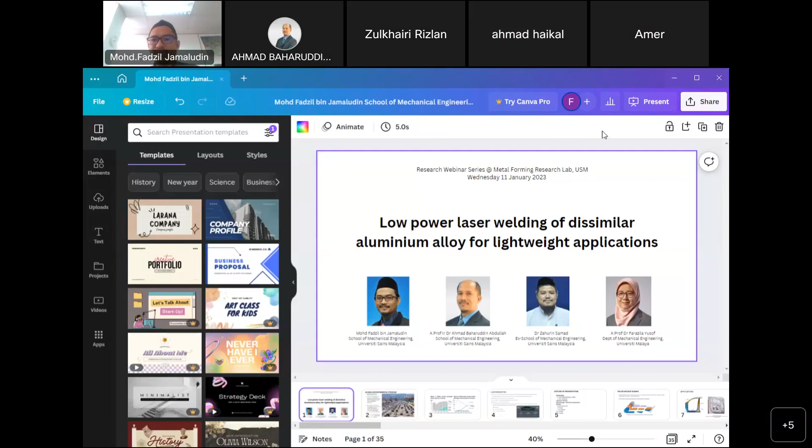Thank you very much to Associate Professor Dr. Ahmad Baharuddin for the introduction. This afternoon I will be presenting the updates of my research on low power laser welding for dissimilar aluminum alloys, which is used for lightweight applications. Team members: myself as the student here, and my supervisors Dr. Ahmad Baharuddin and Zahurin, and Associate Professor Farazila from University Malaya.

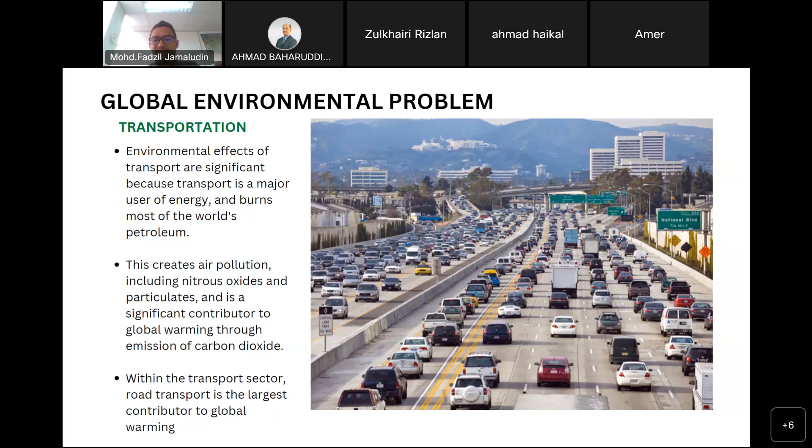The motivation for this study is based on the situation now where we are having global environmental problems from transportation. Transportation is a major use of energy, and the output from our combustion engines causes air pollution and carbon dioxide emissions. This problem is becoming worse because there are many developing countries such as China and India where the status of life is increasing and they are demanding luxuries, having cars on the road.

Even though we are having electrification in terms of electric vehicles and hybrids, data predicts that the number of vehicles will keep increasing year by year. Even though the internal combustion engine vehicles may reduce in the future, the overall numbers will be increasing, approaching 100 million vehicles per year.

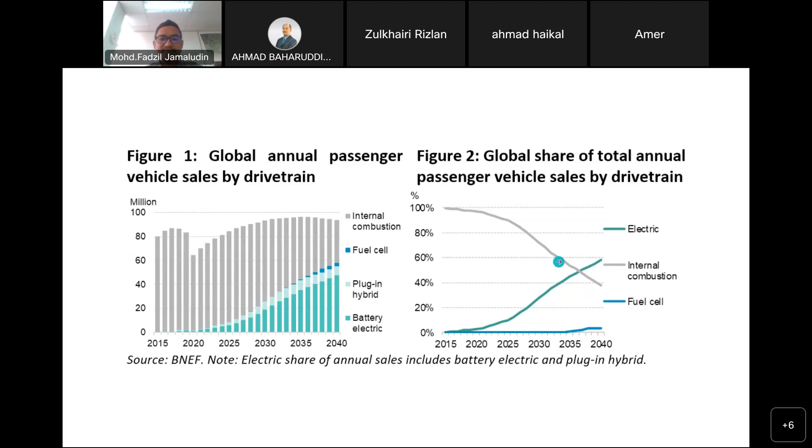So the concept of lightweighting is making the vehicle lighter, regardless of the engine, whether it is using petrol or batteries. The concept is building vehicles that are less heavy to achieve better fuel efficiency, while at the same time maintaining safety and comfort.

Because of this reason, there is a renewed interest and focus on lightweighting. It is said from the literature that a decrease of 10% in weight will translate to a 5 to 8% increase in efficiency. So the key driver here is carbon dioxide emission, and manufacturers are investing in solutions to solve this problem.

The recent ones from Hyundai: they have a lightweight development technology, just recently in 2019. They have a special unit purposely for reduction of weight. And to reduce the weight, it is not just a matter of replacing one material with another. It can also be in the form of redesigning components, and also the selection of manufacturing processes.

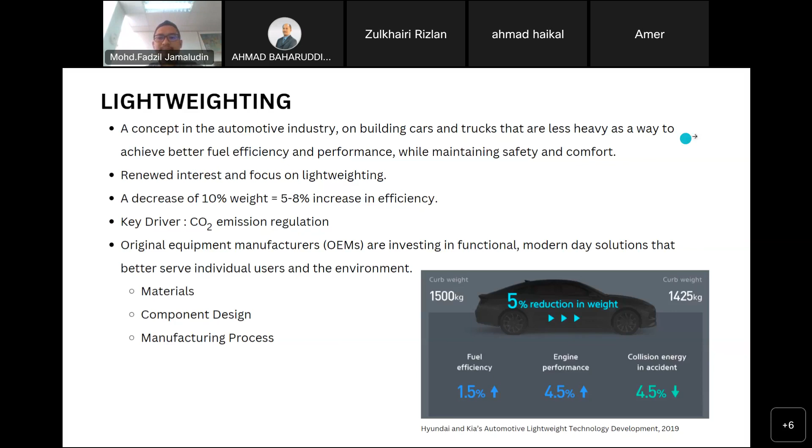So with that background, just an outline of the presentation today: I will be presenting an introduction on tailor-welded blanks. It's not exactly a new technology, but we are seeing it increasingly used in the automotive industry, especially for alternative materials. And on the topic of laser welding, laser welding is not something new, but new technologies in laser have some interesting applications. I'll also present a bit of my experimental work and results on microstructure, showing how the laser welds aluminium, along with some results on tensile and spring back evaluation.

So briefly on tailor welded blanks: the concept is making sheet metals by combining different portions of metals together to make a tailored blank. The difference can be in terms of material, or differences in thickness, or differences in properties. Some sheet metal may have coating or treatment, so that makes it different. So combining them, even if, let's say, they are from the same alloy, because of the different treatment, they become different in response.

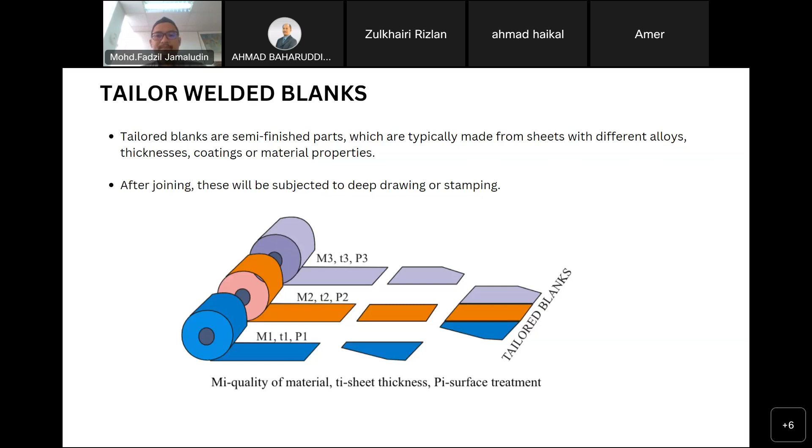And its application: it is being used for the structure of the vehicle. For example, this is a side structure. You can see that these components have different thicknesses, and even here they have different material, different material. So we are placing the strength where it is needed.

It is being used for steel-based sheet metals since the 1980s. It was mostly used in high-end vehicles because this was new technology, but it's being used in mass-produced cars nowadays. For the door component, you can see there's a line here - so this part is one material, and another part is a different material.

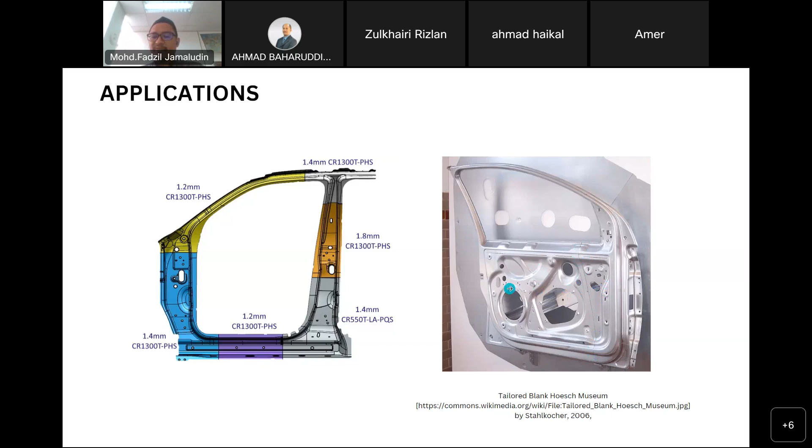This is an indication of where tailor welded components can be used in the vehicle - mostly on sheet metal components such as the door sides, the body shell, the bonnet, and so on. And there are two types of components: either it is welded as a butt weld tailor welded blank, or it can be made as a patch blank, overlapping.

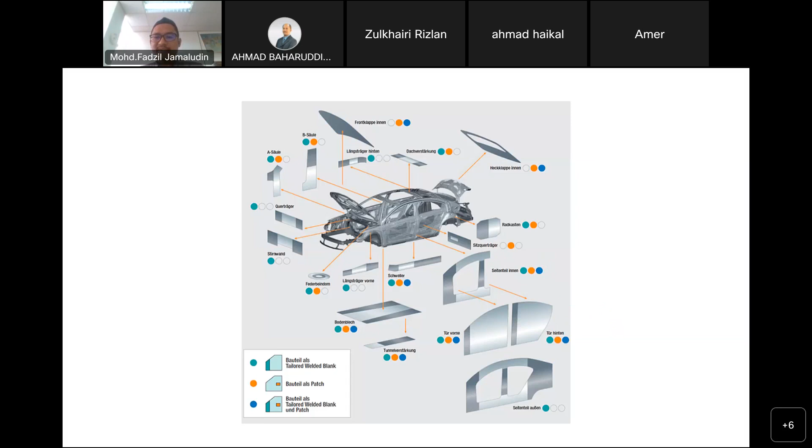So previously, for steel tailor welded blanks, the weight is reduced compared to a normal single sheet metal. But the motivation is that if you convert it to aluminium, it will be lighter because aluminium is just one third of the weight density of steel. So in a way it is lighter, and if you start incorporating aluminium into tailor welded blank components, there is more potential for weight reduction.

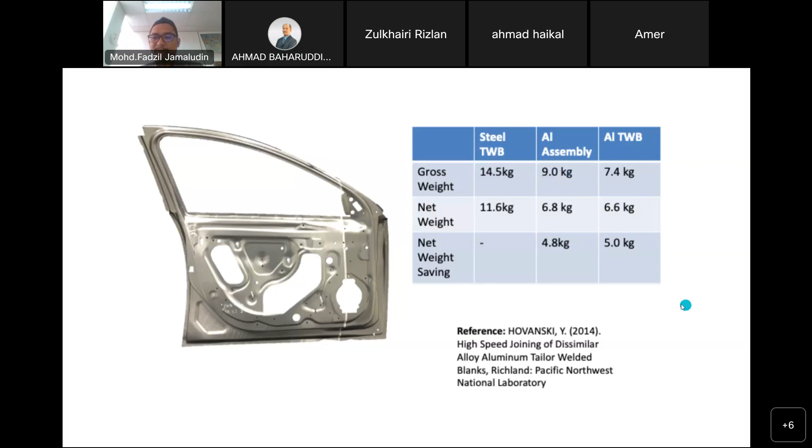A little bit on laser: so laser welding is not actually a very new technology, but there's recent development in fiber lasers. Previously it was using carbon dioxide lasers, which have a higher wavelength, meaning the heat source or heat input is big. But the recent development in fiber lasers means the wavelength is smaller, it is more efficient, and the beam is of higher quality. So there's new applications or new interest in fiber lasers.

Fiber lasers, as seen from recent development, come in many types: the high-powered lasers, the medium-powered, and the low-power lasers. Usually the low-power lasers are used for very small applications, thin applications, for micro applications. The one we have in the lab is a very simple low-power laser, which doesn't require that much power or in terms of any uses, so it can be installed easily.

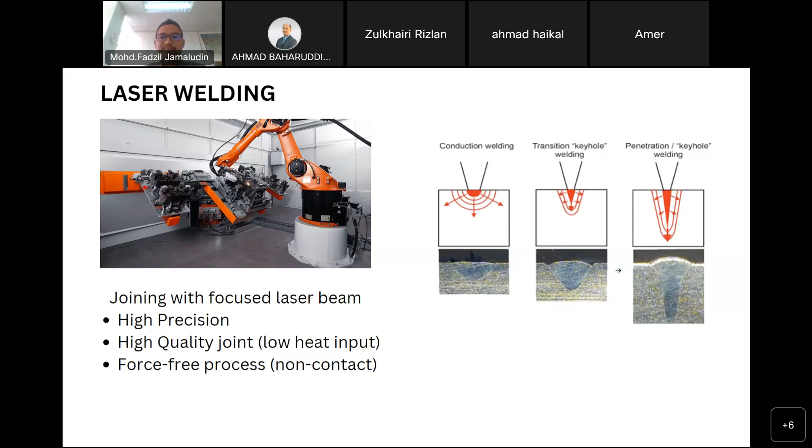Okay, so coming back to my research - as I said, laser joined tailor welded blanks are already in commercial use, but laser joining of aluminum sheet is challenging because it is not so easy to weld aluminum due to the reflectivity of the material. We have proposed that low power lasers are not well documented - there's a few research going on with low power lasers, but not much on actual welding of metals.

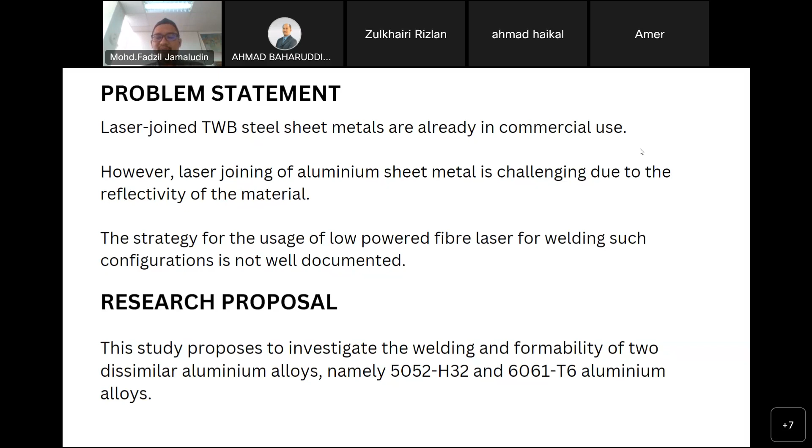So the research proposal is on investigating the welding and subsequent formability of two dissimilar alloys. In this case, we are choosing the 5 series and 6 series aluminum alloys, and examining their mechanical properties and formability properties. As Dr. Baha mentioned, formability studies are not being explored in detail at the moment, so this is something we are currently pursuing.

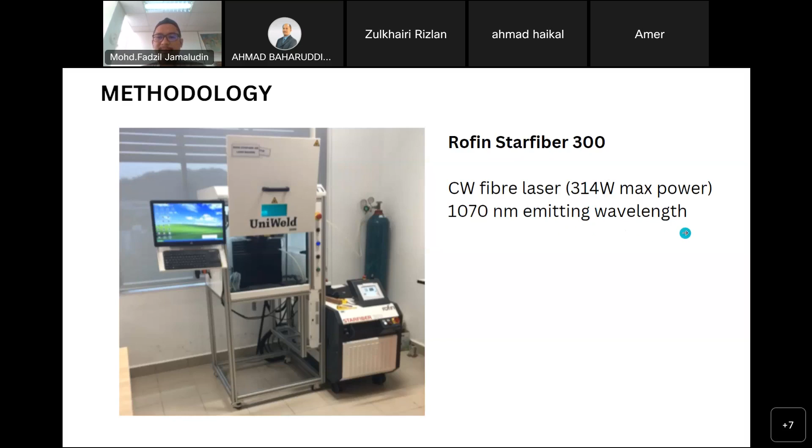So what we have here is the lens system. The lens will position the laser beam. This is called a scanning lens, so we will scan the length of the weld.

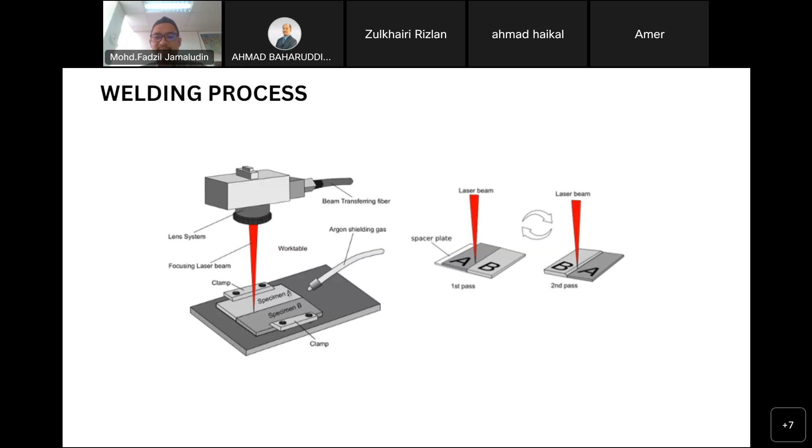In our case, because of some previous studies, we are proposing what we call a double-sided weld. Because of the low power, we found that the penetration depth cannot achieve what we desire. So we proposed that the weld be done in 2 passes: you do one pass, then the specimen is turned over, and we do a second pass using the same parameters on the other side of the specimen.

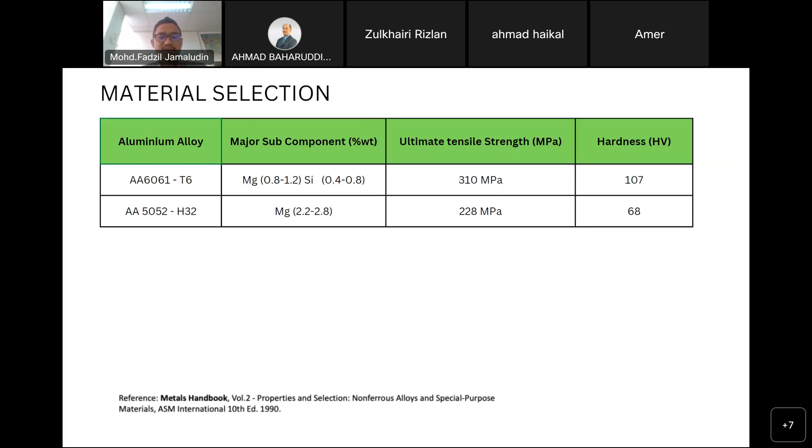And the material selection, this is from the handbook, and we also did EDS to actually see what the components in the materials are.

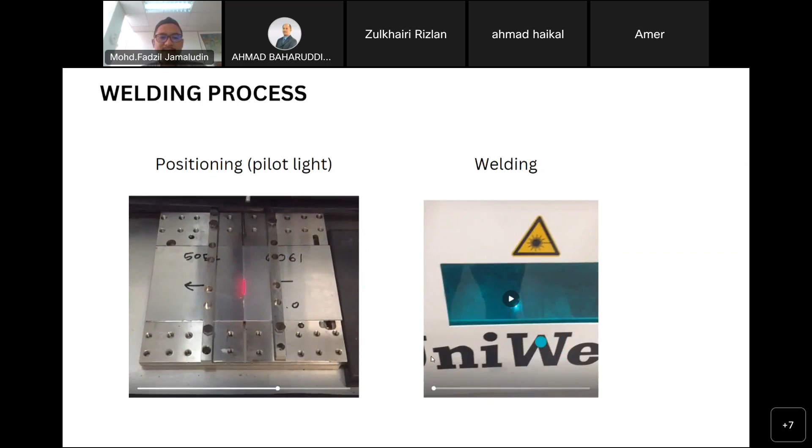And then when we are actually welding it, it is being welded—this is a very fast weld. It takes around less than 10 seconds to do the 10 mm weld.

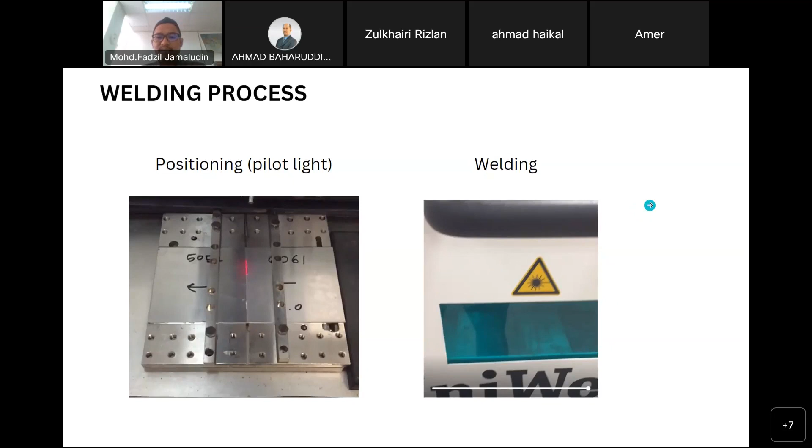So for our preliminary test, what we did was weld 6061 and 5052, and we arranged it into a Taguchi experiment just to see what the influencing factors are. In this case, we just evaluate the laser power and the welding speed, and so on.

So for this test, we have tested 3 groups: the same alloy but different thicknesses, different alloys with the same thickness, and different alloys with different thicknesses.

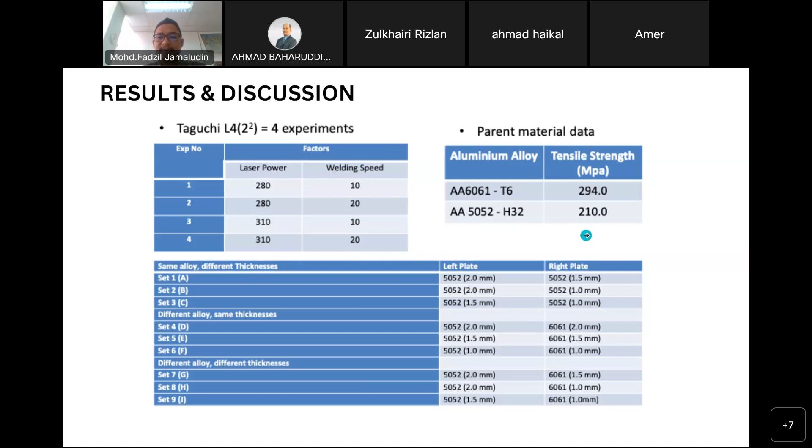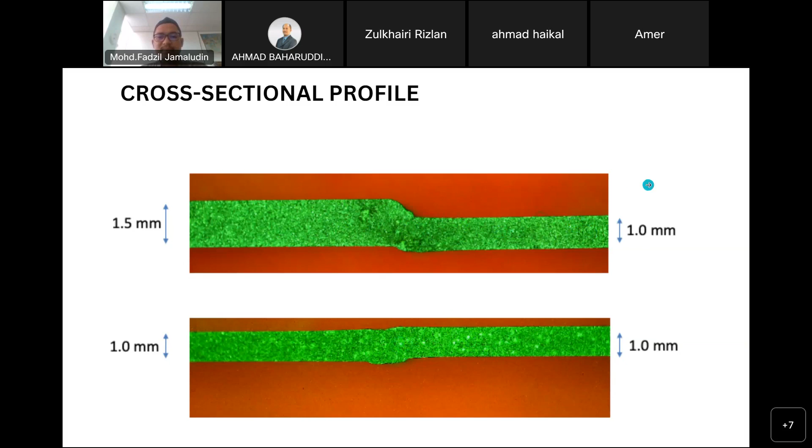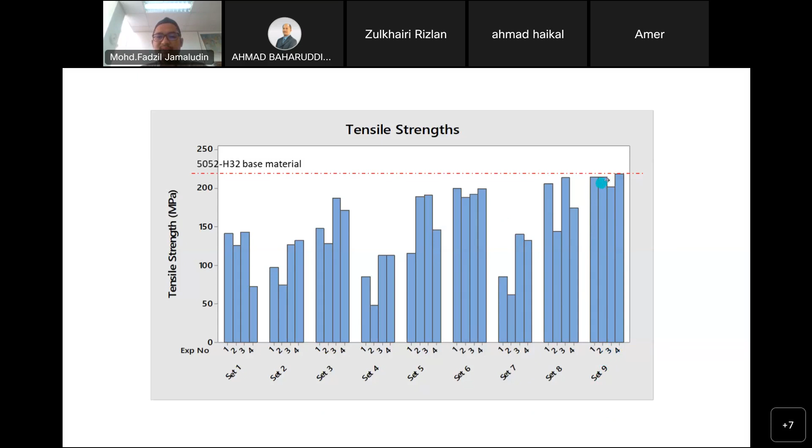In terms of tensile strength, overall, in general, for all samples, it was less than the base material. The tensile strength is less than the base material, but for some samples it is approaching the tensile strength of the base material. As you can see, for set 9, with different thicknesses and different alloys, it is approaching the base material strength.

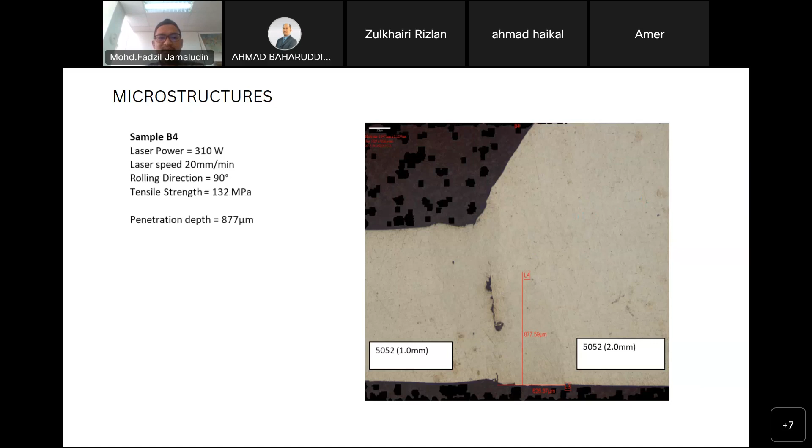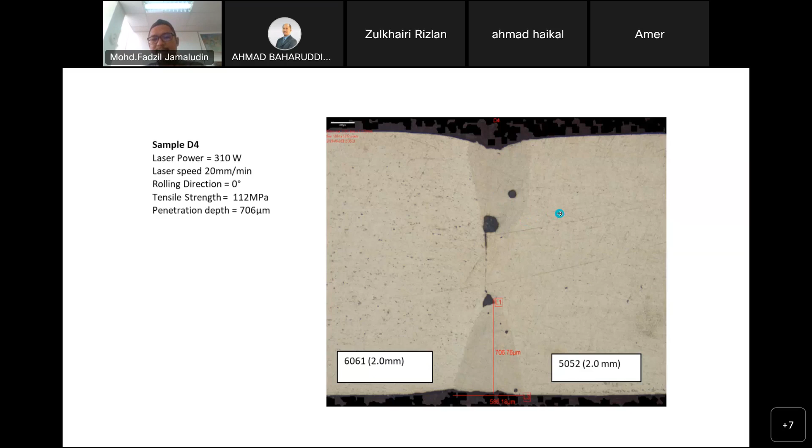For different alloys but the same thickness, this is much clearer for the same thickness at 2 mm. You can see that for 2 mm it cannot be done properly because the penetration depth is only 700 microns, so you have some areas which are not welded. This is one of the reasons why the samples have less tensile strength, because only a portion of the sample is welded.

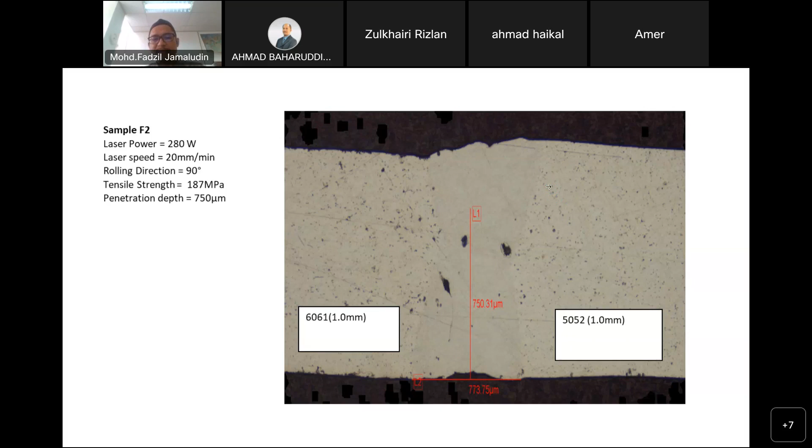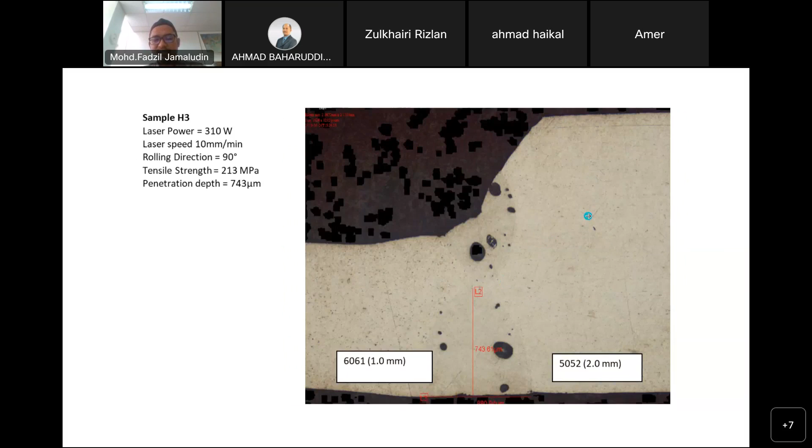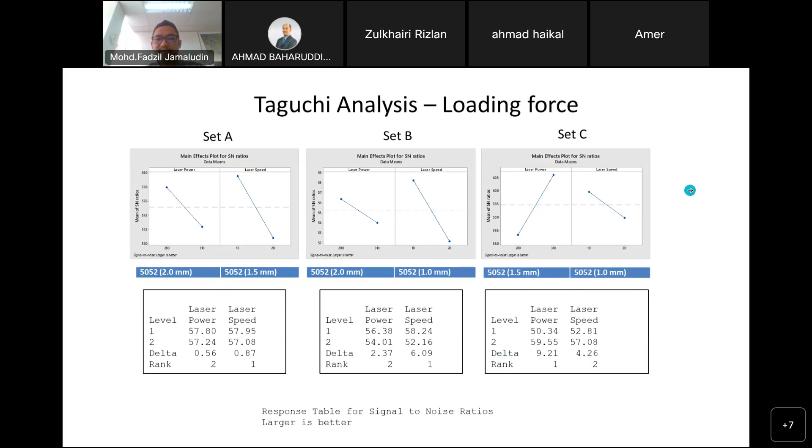So from the Taguchi analysis, we can see that the most significant factor is the laser—laser speed and laser power, with laser power being more significant than laser speed. So in terms of ranking, laser power ranks higher, having a greater influence on the tensile strength.

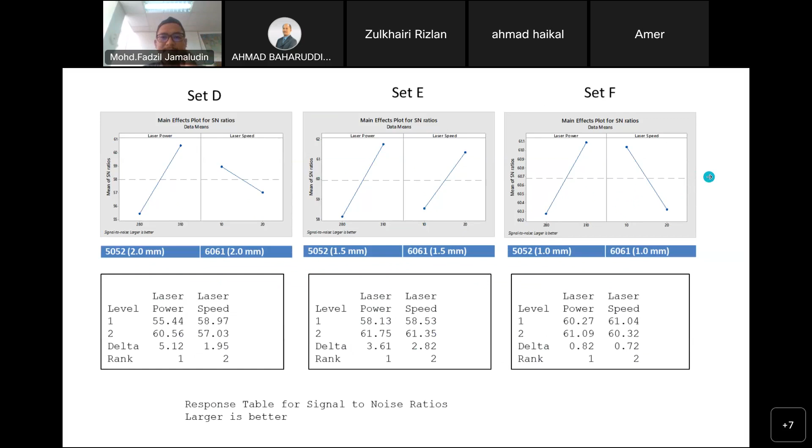Okay, this is overall for all the samples, 3 groups. So for the tensile test, what we have observed is that it achieves 86%, nearing the tensile strength of the lower specimen or lower strength parent material.

The laser power was shown to have the biggest influence on the load, unless one of the segments has a thickness of 2 mm. I think the 2 mm was because the weld was not successfully made.

As for number 3, we mentioned that partial penetration was observed for thick specimens, and for smaller specimens at 1 mm thickness, we can see an overlapping of the weld bead, which is desirable, but unfortunately porosities are observed, and this can influence the mechanical properties.

For welding of aluminium, porosity is something that, even with other welding technologies, cannot be completely avoided, but we try to minimize it. This is another area we can look into. Porosity is usually caused by entrapment of gases during solidification while welding.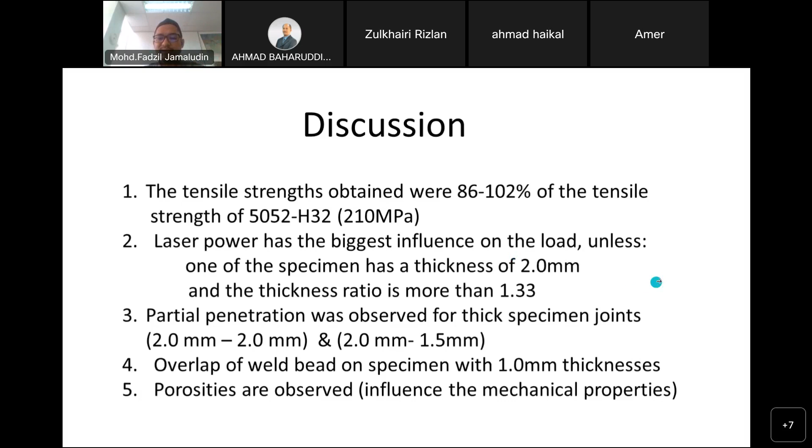A little bit on the spring back studies we did later on. Spring back is important because once we form or create the specimen or component we want, we need to take spring back into account.

Spring back is that, because of elastic recovery, once you bend it, it will tend to return to its original shape. So in most cases for sheet metal forming, spring back is something we need to take into account.

Either we can modify the die to take into account the spring back, or we can do some other processes. So the final shape is a deviation from the working shape of the die.

Why it is important is because large structures are really made up of sub-assemblies. For example, you make one component of the car, you stamp it, and we need to assemble it. If it doesn't follow the shape we want, the assembly becomes very difficult. So these are things we need to understand, things like porosity that we cannot avoid, but we need to understand.

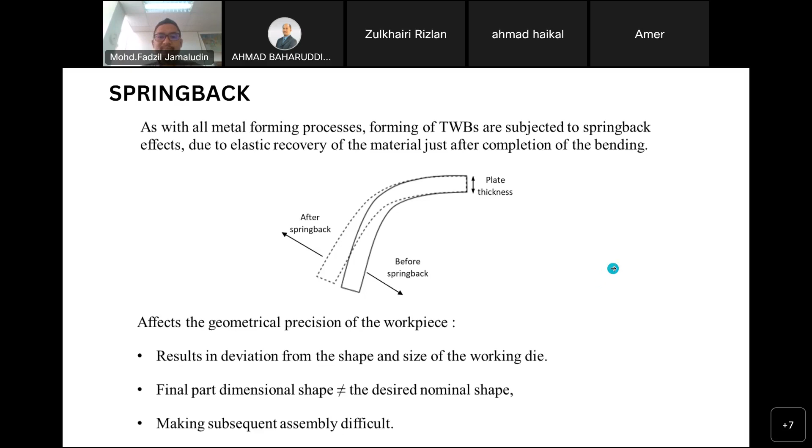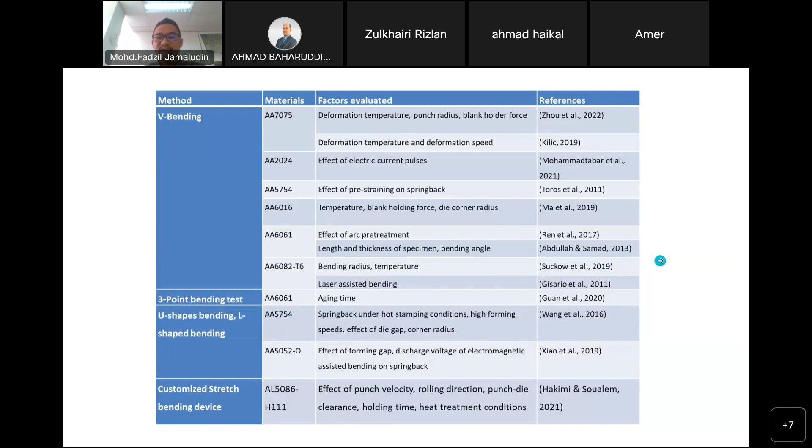There are many studies done on methods of evaluation, either by V-bending, 3-point bending test, or customized bending devices. In our studies, we focused on V-bending because it is quite straightforward. So for the samples we prepared, coupons from the same welding plate.

Coupons of 20 mm by 100 mm, and we selected two groups: similar alloy and dissimilar thickness, and dissimilar alloy and similar thickness. We focused on 1.5 mm and 1.0 mm only, because from the previous study we saw that 2 mm is quite difficult to weld and the results are not so good.

So we are focusing in our second section only on the 1.5 mm to 1.0 mm joint, and these are the welding speeds and parameters that we used.

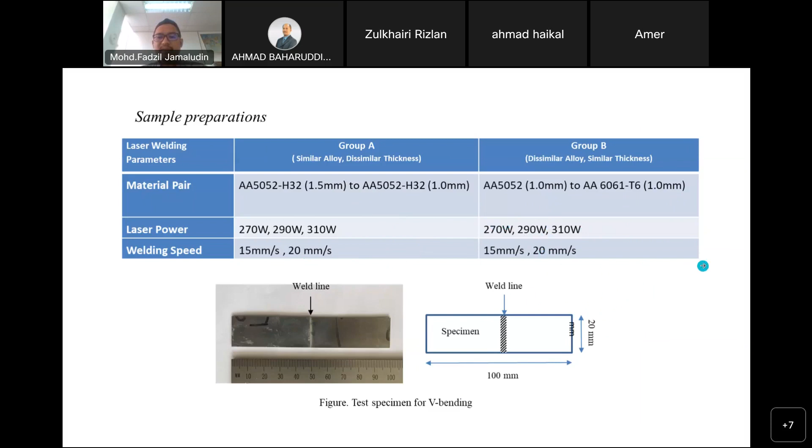We designed this V-bending testing jig, which is mounted on the Instron machine. What we did is move the punch so that the coupon would bend by the punch, and it is kept in place.

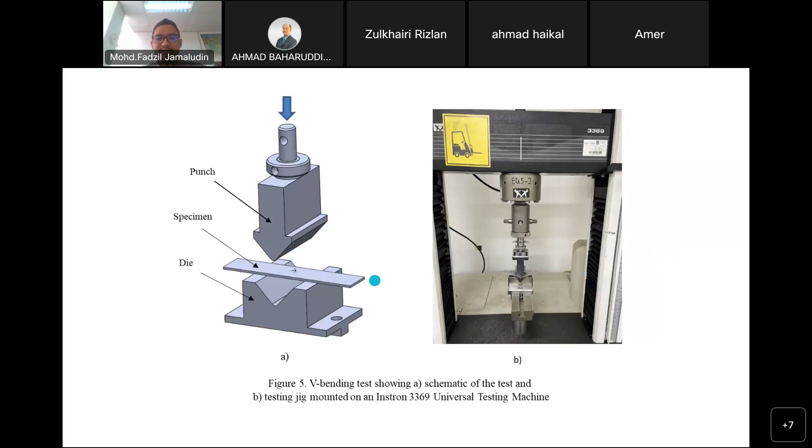You punch it until it reaches the bottom, then it is released, and the specimen tends to spring back. Since it's a 90 degree angle, the difference in angle indicates the spring back angle after unloading. We use a profile projector to accurately measure the spring back from the specimen after being punched.

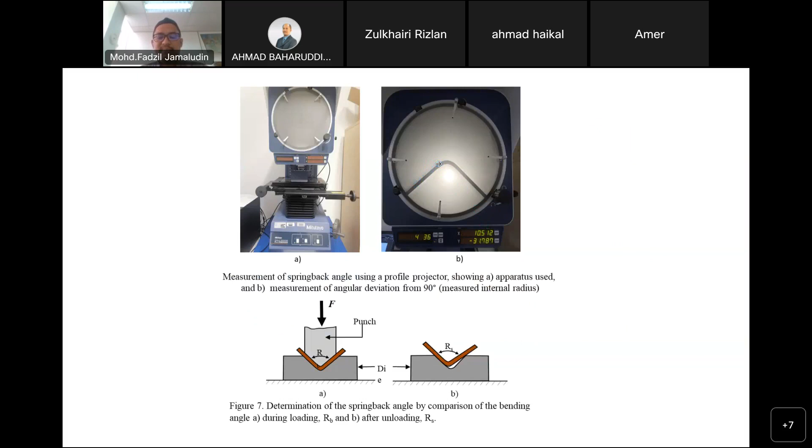To compare, we tested it on the parent materials, so we know what spring back the parent material has, giving us the range of spring back for aluminium 6061 and 5052. From this evaluation, you can see that the spring back for 6061 is higher than the 5 series in our case.

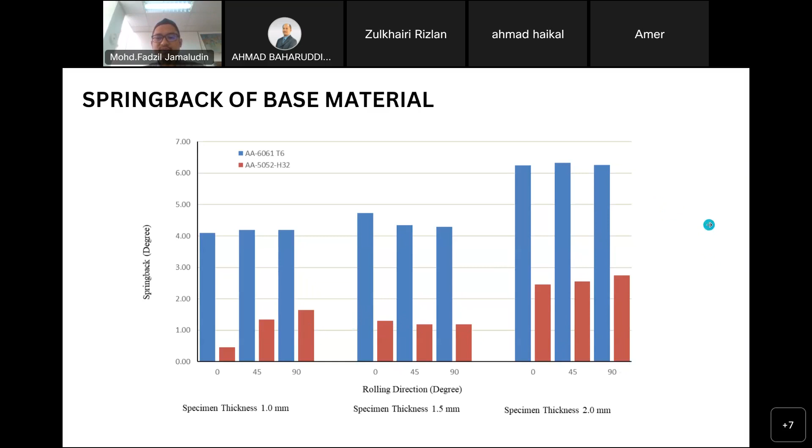This was for all thicknesses, 1.0, 1.5, and 2 mm. We also have some 2 mm just for comparison. You can see after we did the tests on the specimens, these are the results we got from group A.

So what we have observed is that the spring back for tailor-welded specimen has a better performance as compared to 6061, but it is inferior to 5052. And for particular laser power, increasing the welding speed would increase the spring back angle for the joint.

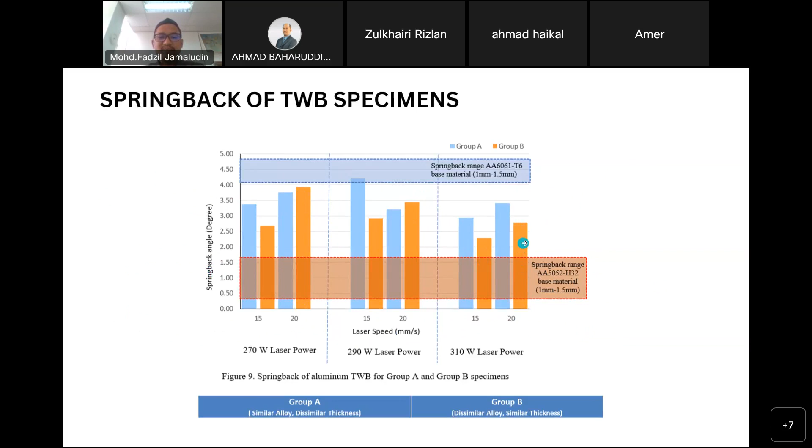For particular laser power, what particular power? So for this one, it tends to be higher. For particular laser power, tends to be higher for the laser welding speed, increasing laser speed.

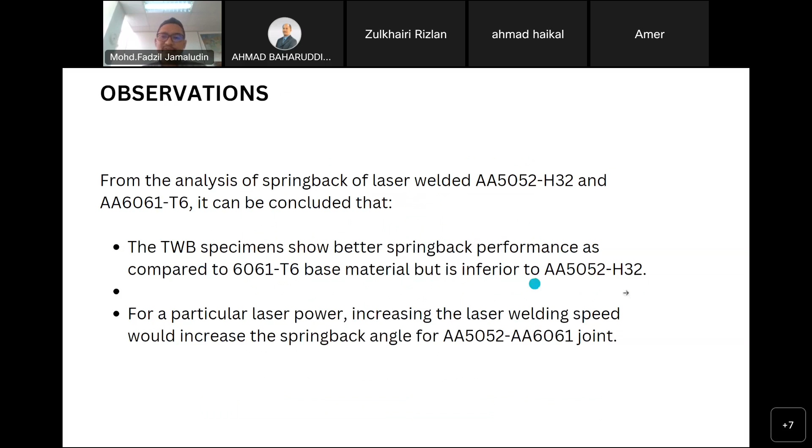Okay, that is all for the presentation on my part. I hope it can be beneficial and as an introduction to the fiber welding for dissimilar aluminum alloys. So thank you very much.

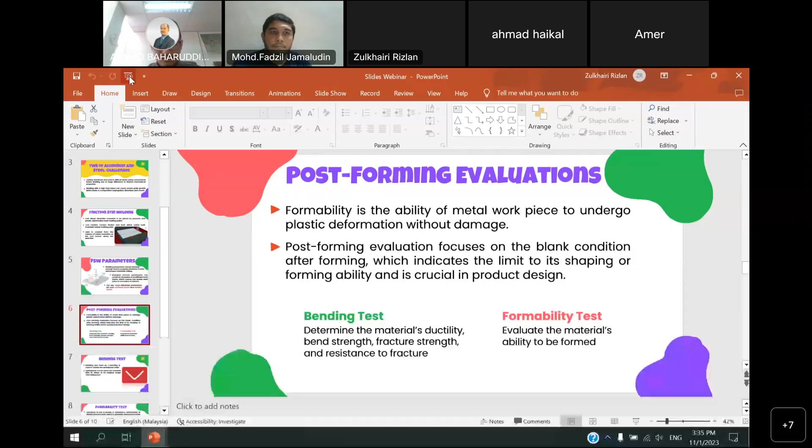Alright, Assalamualaikum and good evening everyone. My name is Zulkhairi and I'm about to share about my research here, which is formability study of aluminium and steel friction stir welded blanks.

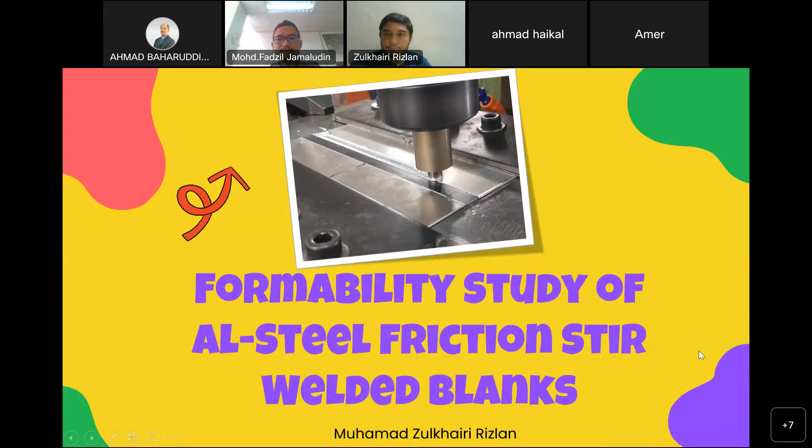So in terms of application, the tailor welded blank of aluminium and steel is used in less critical sections of parts where it is not necessary to use high strength steel but require lightweight components. For example, in automotive industry, high strength steel and lightweight aluminum alloys were applied to enhance performance, reduce weight, and with reduced weight, you get more fuel efficiency, which is beneficial to comply with fuel economy standards.

Some of the industrial applications that has utilized tailor-welded blanks can be seen in the Honda Accord 2013 models, where they use friction stir welding, cast aluminium and steel in the engine parts and subframes. Another one is the Mazda MX-5, where they use friction stir spot welding, aluminum and steel, and aluminum alloy and steel on the trunk lid parts.

For shipbuilding, use of aluminum and steel joint can eliminate problems such as presence of crevice and galvanic potential difference, which will result in corrosions when using mechanical joining methods such as bolting or riveting.

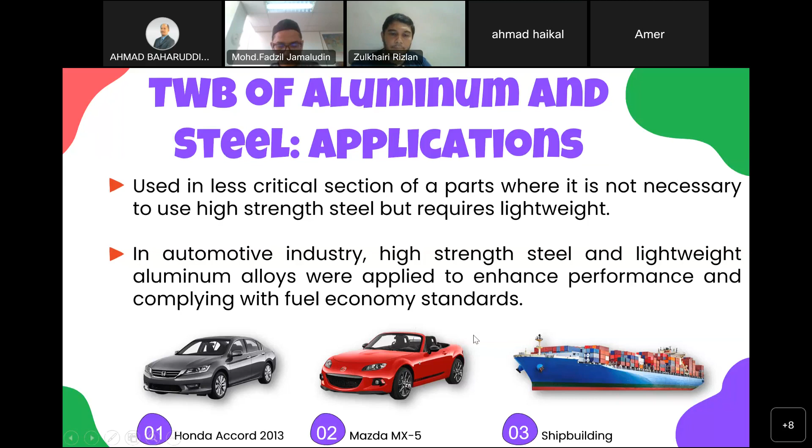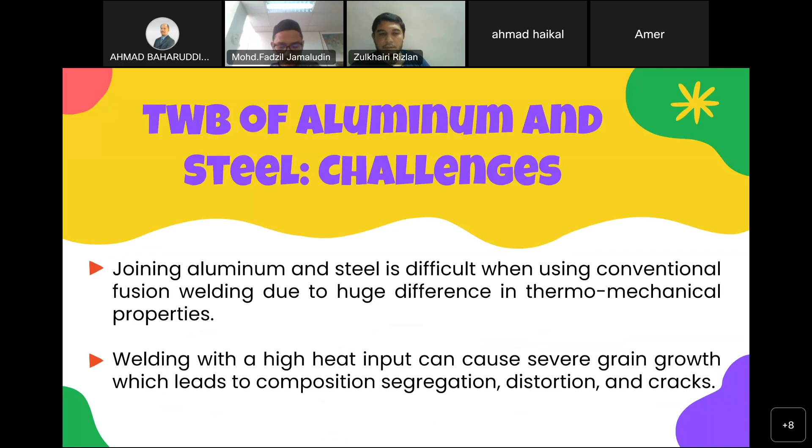So the challenge in the tailor blank of aluminum and steel is the difficulty to join when using conventional fusion welding due to the huge difference in thermomechanical properties. And welding with high heat input can cause severe grain growth, which will result in problems such as composition segregation, distortion, and cracks. So this is where friction stir welding came in handy.

This allows dissimilar materials to be joined by pressure and plastic deformation under the melting point, as can be seen by the animation here. Friction stir welding works by using a rotating tool, which is rotated and plunged into the interface of two workpieces. The tool is then moved through the interface of the workpiece, and the frictional heat causes the material to heat and soften. The rotating tool then mechanically mixes the softened material to produce a solid state bond.

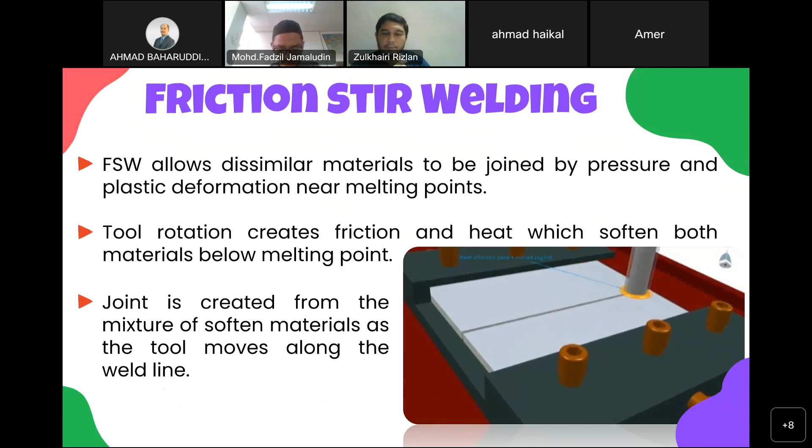Basically, the parameters in friction stir welding should generate enough heat to properly plasticize the material and ensure proper material mixing, since improper process parameters can result in excessive or insufficient heat input, which will cause a low quality weld joint or formation of defects. There are many parameters involved in friction stir welding, but based on previous works as well as mine, the two most influential parameters are rotation speed and welding speed.

So these two parameters are the most responsible for heat input variation in friction stir welding. For example, if the rotation speed is high, then the heat input will be high as well. Contrary to rotation speed, for welding speed, if the welding speed is high, the heat input will be lower.

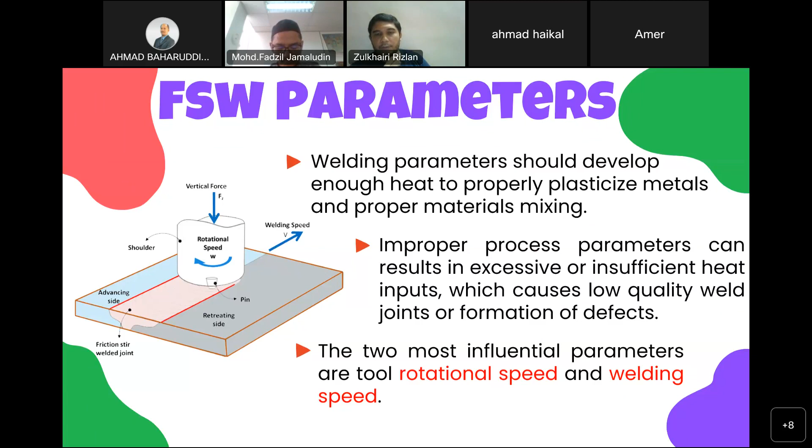Formability is the ability of a metal workpiece to undergo plastic deformation without damage. Post-forming evaluation focuses on the blank condition after forming, which indicates the limit to shaping or forming ability, and it is crucial in product design.

There are two post-forming evaluations of a joint that can be done using bending and formability tests. Bending test determines the material's ductility, bend strength, fracture strength, and resistance to fracture, while formability test evaluates the material's ability to be formed.

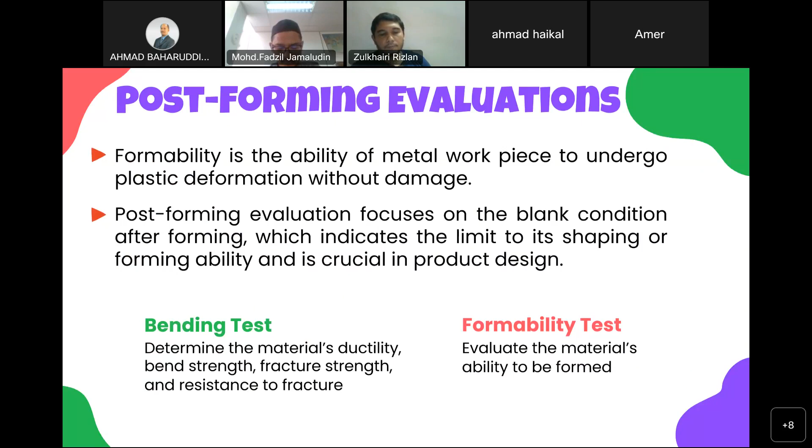Bending tests such as V-bending, which I use in my research, is used to obtain the spring back value. Spring back occurs when the material tries to return to its original shape after being bent because of its elastic recovery.

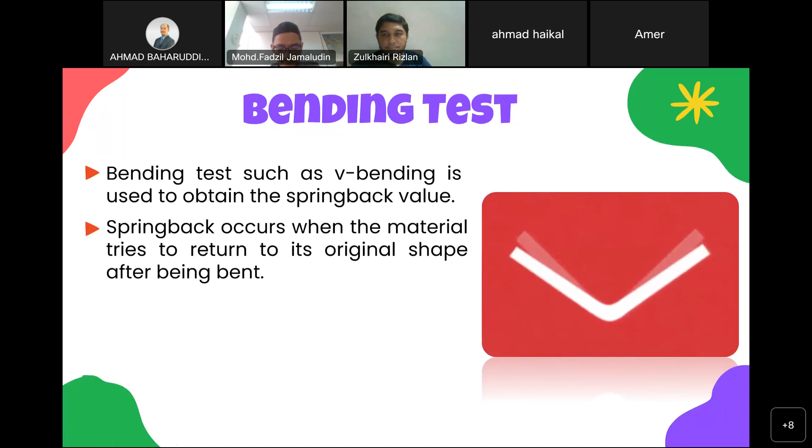For formability test, in my research, I use limit dome height test. Specimen in limit dome height test is known to experience deformation in biaxial stretch mode, which is generally observed in sheet metal forming. Limit dome height test simulates the common failure strains in sheet metal forming process.

From the animation in LDH, strain concentration will develop in the weld region or the center of the punch as the punch continuously moves. The dome height at maximum is used as a measure of its stretchability.

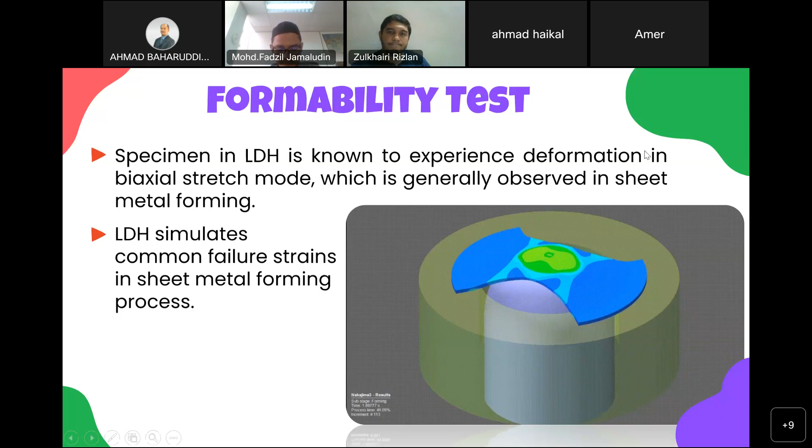From the limit dome height test, forming limit curve can be plotted by using the strains. In limit dome height, the material can sustain strains underneath the forming limit curve without failure due to necking or fracturing. Forming limit curve shows the transition from safe material behavior to material failure, and it is used to optimize sheet metal forming and also as a failure criterion for formability prediction.

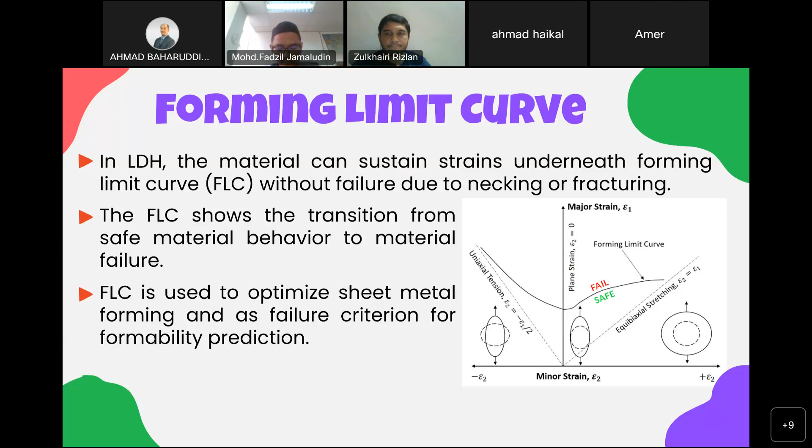That's all for me. Thank you.